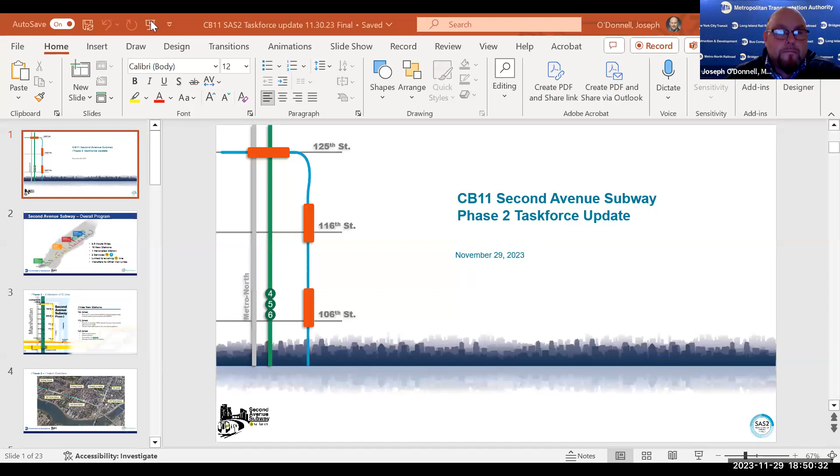Yes, go ahead. All right, so the beginning of this is a lot that you already know, that there will be 3 new stations. 106th, that's going to be a new cut and cover station.

So that work is a little bit more intensive, more like the construction means and methods folks were used to at 96th Street. This is primarily because of the elevation of the station here, and the need to connect into existing infrastructure. We have tail tracks that extend from the existing 96th Street station, the terminus of phase 1, up to 103rd, 104th Street, used to lay up a train if it's disabled and we need to get it out of the way. We'll utilize those tail tracks to extend from 96th Street up to 105th Street, where we'll pick up work and build out the 106th Street station.

That'll be cut and cover. For the 116th Street station, I believe Xavier you've been down there with us to the 116th Street tunnels in the past. That's where they built those 1970s era tunnels. It's a great starter hole for us. I haven't been down in the tunnels. I thought you were down there when we went with Espy a year or so ago, but we'll have to get you guys down there then. Yeah, that'd be great.

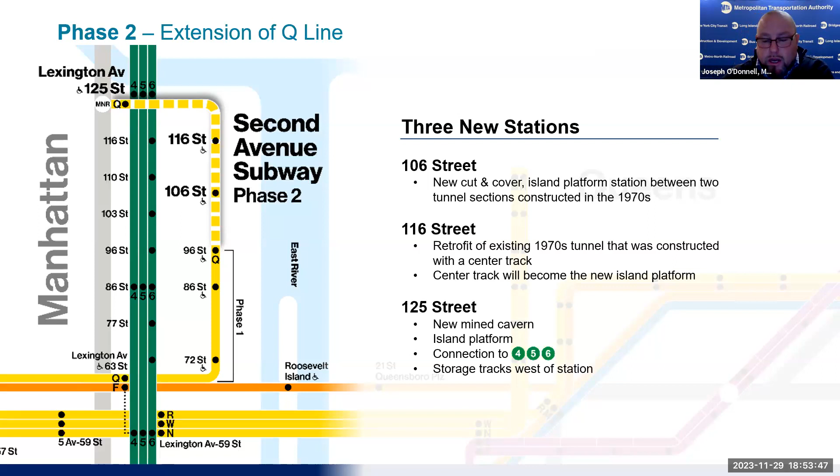So the most disruptive portion of this work will be in that 106th Street station area. So 106th is the more challenging aspect of it? Correct, yeah, because we have to do that all from the top down.

This is a drawing I believe you've all seen before. It lays everything out, where we're connecting to the existing tunnels in green south of 106th Street, then the 116th Street station, using those 1970s era existing tunnels from approximately 110th to 120th, where we'll build out the 116th Street station. Just north of that, we'll drop the tunnel boring machine, and there'll be two running tunnels, one for northbound and one for southbound, mined by the tunnel boring machine.

We're going to send it on its way, and it'll run north and then turn west at about 124th Street before it connects to 125th Street. It'll run all the way to Lenox Avenue. We'll take it out of the ground, bring it back to 120th, drop it in again, and let it bore the second tunnel—if we do the southbound first, this will be for the northbound, or vice versa.

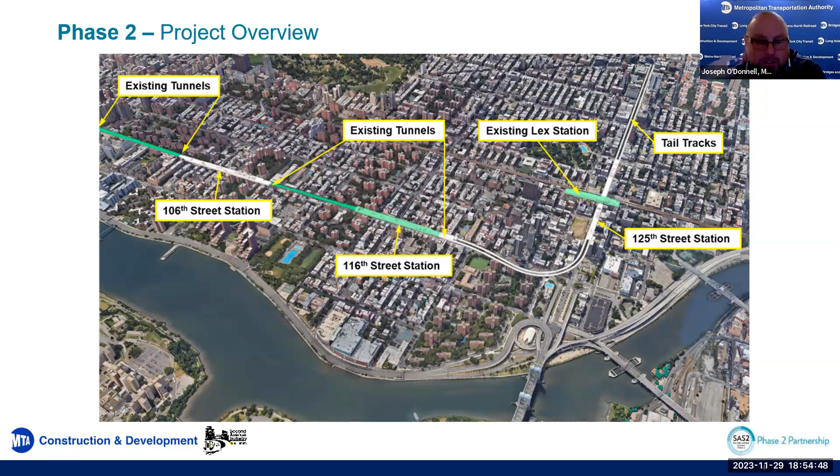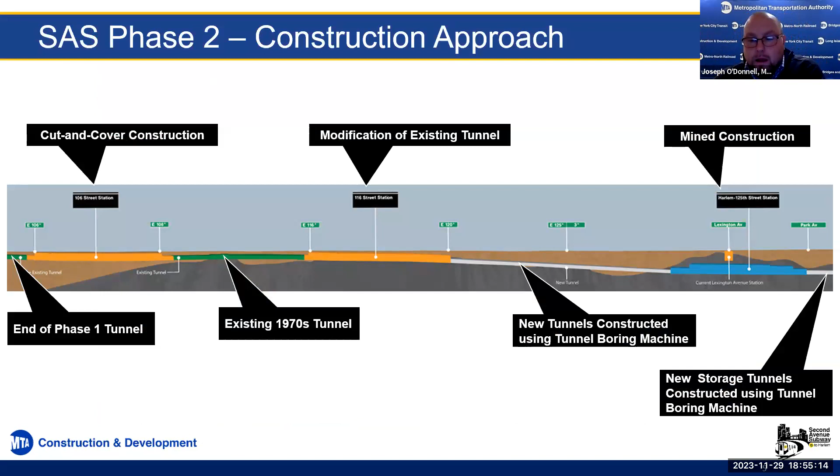This explains a little bit more graphically what I was talking about, where the 106th Street tunnel station will be cut and cover construction, modification of the existing tunnel work at 116th Street station, and then the 125th Street station will be all newly constructed using a tunnel boring machine and mined from underground.

Talked a little bit about this already, where we are: one contract already on the street, released in June, and we got our fully funded grant agreement in 2023. We expect to award that first contract by the end of this year, with work to begin in early '24, likely around the end of Q1. Currently the project is still in the design phase, with utility work to begin in early '24.

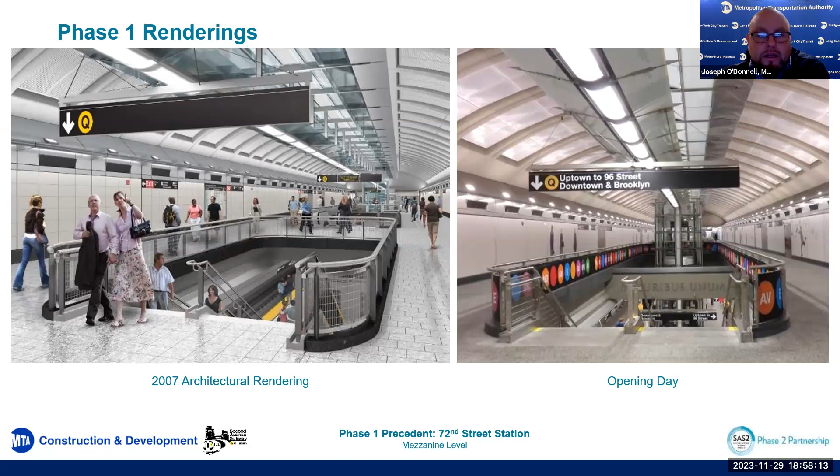If you look on the left-hand side, that is a drawing, and on the right-hand side is a picture of the actual finished product. So they get it pretty close. When I get to show you what the renderings are like for the respective 106th, 116th, and 125th Street stations, it's with the confidence that color of tile, color of brick, brightness of lighting, things like that may change, but the overall look and feel is going to be pretty close. The artists get it pretty close.

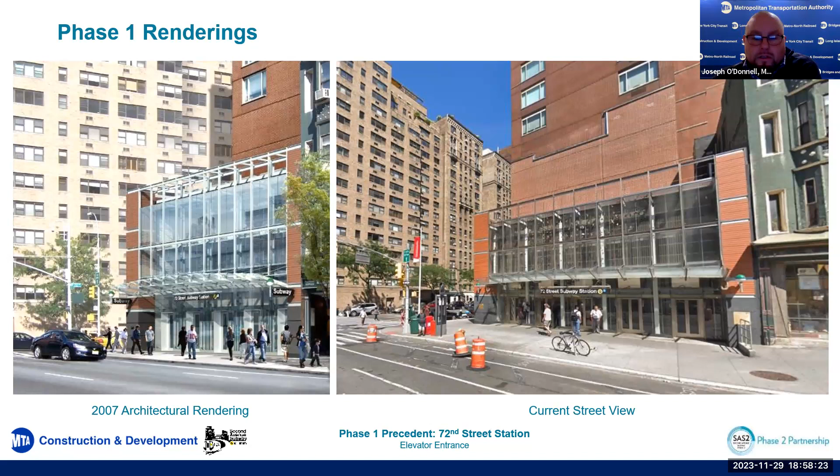So this is the elevator entrance at 72nd Street. On the left-hand side was the rendering, on the right-hand side is the current street view. It's 96th Street on the left-hand side, and on the right-hand side an actual picture in 2017 after service was opened.

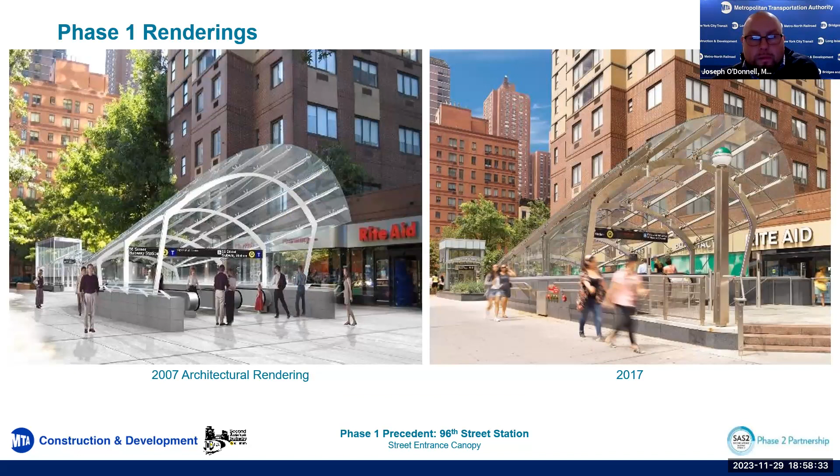Those vents that you see, folks get heels caught into - we have a big problem with old grating in East Harlem and Central Harlem with the sidewalk heaving. We always get calls from folks with regard to trip hazards related to those metal grates, because water gets in there, and then when they freeze, the concrete buckles and they heave, and it's a problem.

So we're not going to be using grating as part of phase 2. There may be some existing grating from those 70s era tunnels or from the existing system around 125th Street that we leave in place.

A lot of that is going to use the ancillary structures to push and pull air into and out of the station. It also gives us greater confidence and safety if there's a smoke condition in the station, since we can add fresh air more quickly or pull smoke out of the system if needed. Those will be at the bookends of the stations, north and south for 106 and 116, and east and west for 125th Street.

Similarly, all of the stations are going to have two entrances. All of the stations will have ADA accessibility, so there will be elevators and escalators as part of all the stations, as well as stairs.

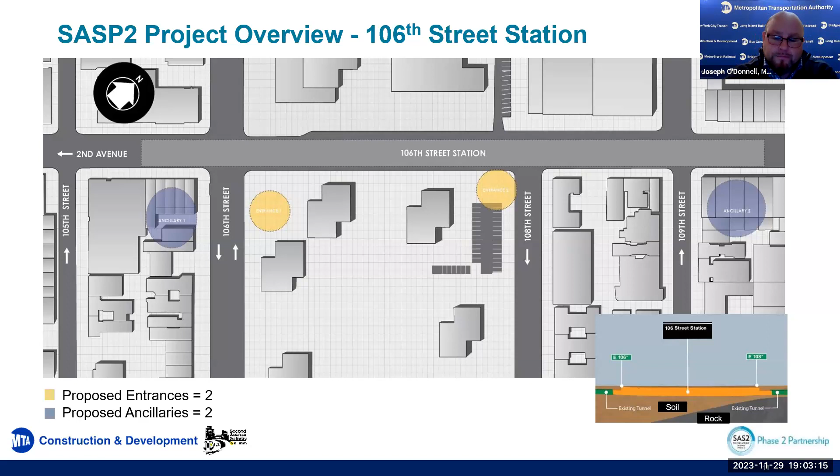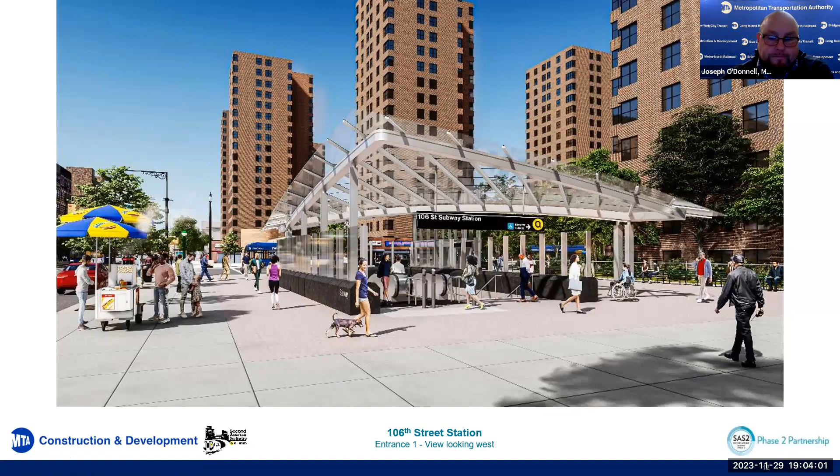Sorry, did somebody have a question? I thought I heard something. We'll hold questions until you finish the presentation.

And then here's 116th Street, again with the ancillaries to the north and south. A little distinction here: the north ancillary, ancillary 2, will be on the west side of the street, done intentionally to minimize disruption. On the right-hand side of the street you've got NYCHA properties and a church that we're looking to avoid negative impacts on, so we've moved the ancillary — originally it was on the east side of the street.

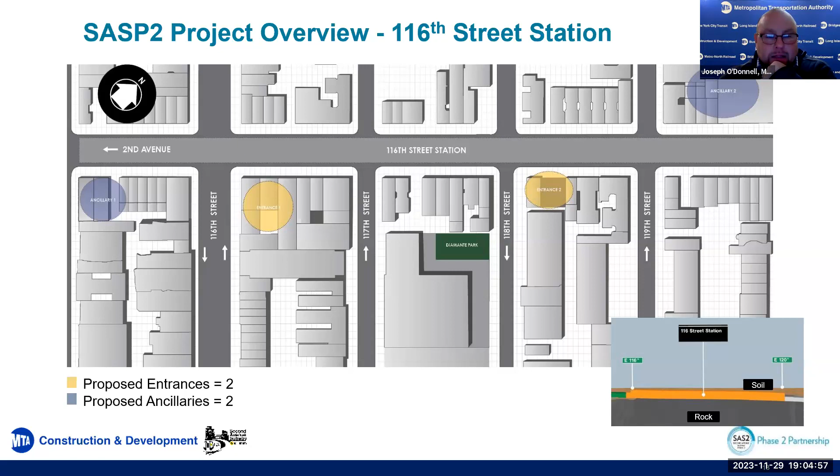Now it's going to be on the west side of the street. I don't think that's a new wrinkle, I think we've been talking about that for quite some time. But again, just to point out how we're trying to do our best to make sure that we're minimizing impacts

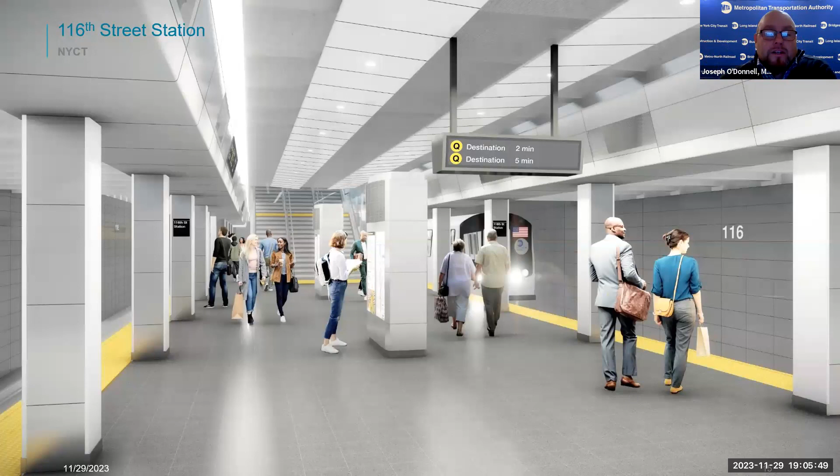This is a platform level look. So you see where we've built this center platform out now. On the two extremes, you see the running tunnels. The one on the right-hand side, you actually see the train. On the left-hand side, there is no train. But the existence of that maintenance track from the 1970s allows us to build out this platform.

So we're going to take that down. We're going to take down the existing concrete that's there down to the track level, and then build that up to the platform height as we move forward in the existing tunnel work.

The primary lot, closer to 125th Street, that was Durst property, which we acquired from the Durst folks. There's a center property there. It was broken down into 3 parcels: the one closest to 125th Street, the one closest to 124th Street, and then a center parcel, which was HPD, which we acquired from the city as part of a land use swap. They gave us that in exchange for some previous land considerations from the MTA.

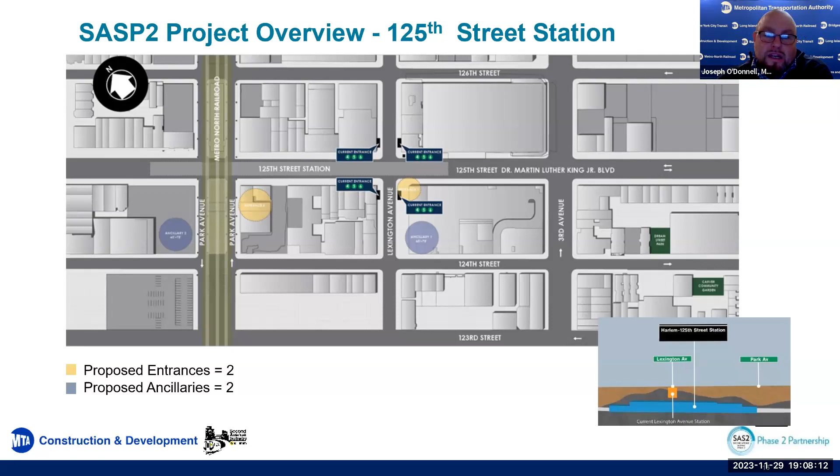We've acquired a box. As Extell looks to develop their site, we've acquired an easement inside their property where they're going to build us a box so that when we get there, if we're there after they're already developing, that box has been preserved that allows us to build our station entrance. And that's going to connect you seamlessly to the 4-5-6.

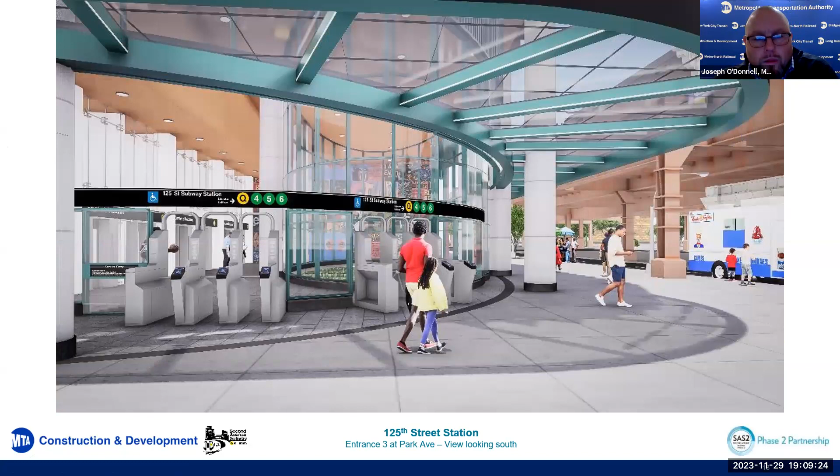Here's a street level view. Again, showing you the elevators on the left-hand side and the turnstiles. This sort of glass atrium area here, or what looks almost like an aquarium of sorts, or a terrarium — that's air handling. That's going to allow us to bring air into and out of the station. So that'll go all the way up through and all the way down to the platform level. So that's, again, another way to adaptively reuse that space to get air in and out of the station.

There's a better look, or a closer look at that location. On the right-hand side now are the elevators.

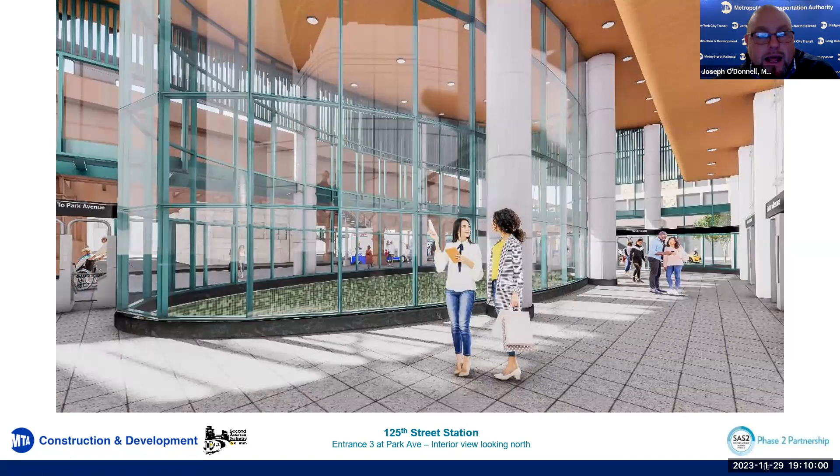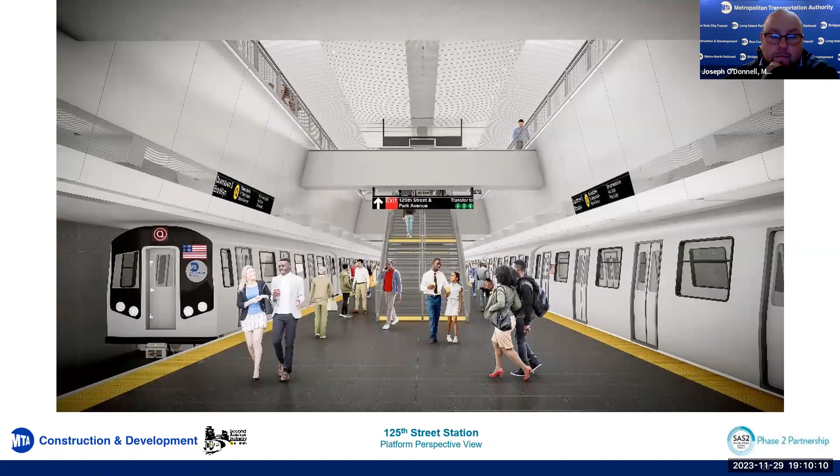A lot of natural light is being brought into the station here. And then here is the platform level of the uptown and downtown tracks.

So I don't know, Xavier, if you want me to stop sharing so we can have a discussion, or if it's helpful to leave this up so we can go back to things. You let me know, and I'm happy to take questions.

Yeah, leave it up, and thank you for the overview. One question I'd have is on the Q line from phase one—it seemed you had the secondary entrances south of the primary, like 96th and then 94th and so on. So why was there a shift toward a northern approach?

I don't know that it was a concerted decision. I think it was based on the property we needed to acquire, and again, trying to be minimally impactful. For 106th Street, you've already got that natural footprint in the plaza there. If we built a larger showpiece entrance for 106 at the 108th Street side of the station, we'd be taking that much more space from Franklin Plaza and impacting that much more parking. But I can ask our design team if there was a reason for north-south beyond minimizing impacts.